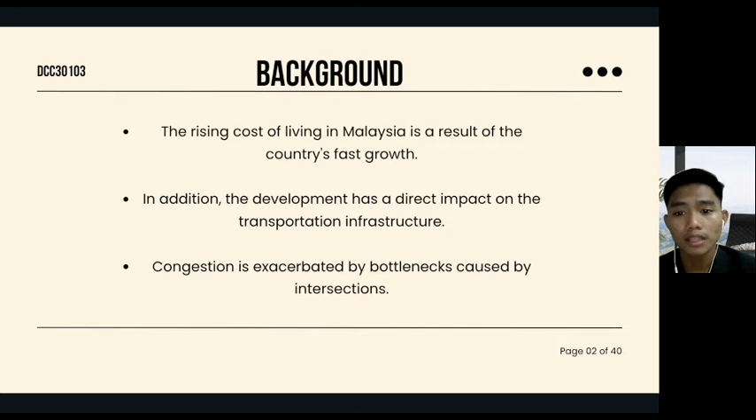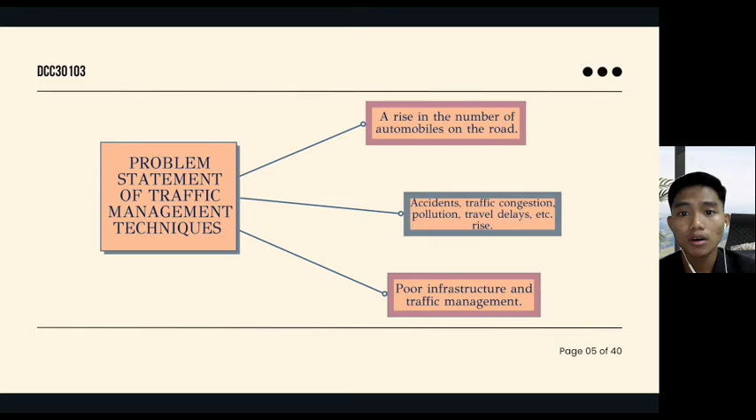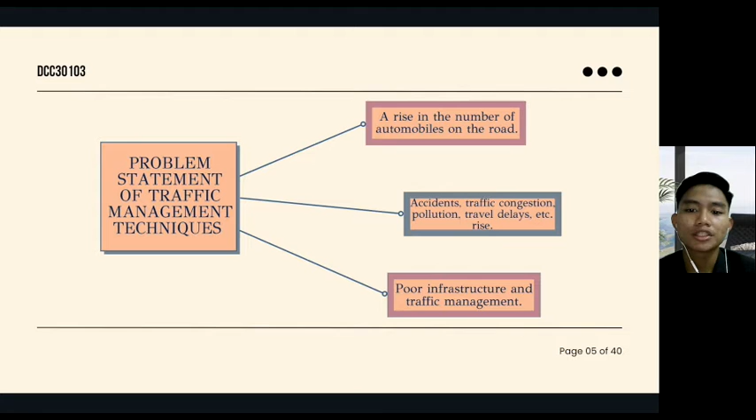Problem statement of traffic management techniques. We have three. The first one is a rise in the number of automobiles on the road. Second, accidents, traffic congestion, pollution, travel delay, and rise. Infrastructure and traffic management.

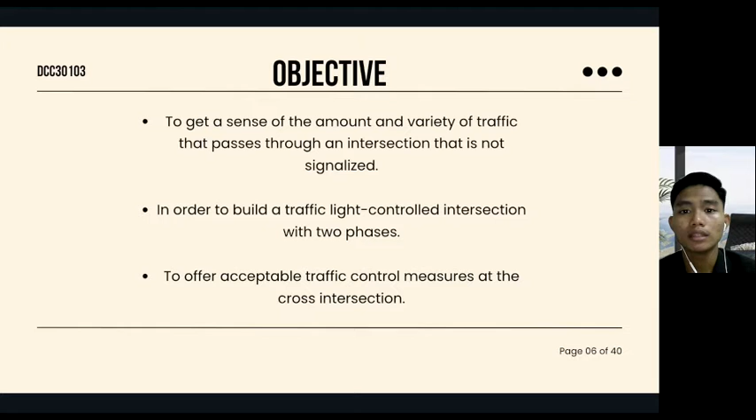Next, objective. To get a sense of the amount and variety of traffic that passes through an intersection that is not signalized, in order to build a traffic light controlled intersection with two phases. To offer acceptable traffic control measures at the cross intersection.

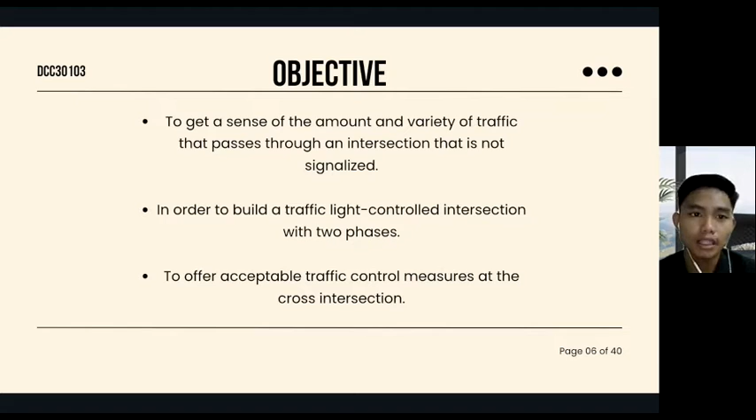Limitation. Inappropriate intersection traffic control. The uncontrolled yield or the stop sign is the sort of control that is used. It should not be utilized in this manner given the current circumstances, which include the volume and speed of the traffic among other considerations.

Inadequate intersection sight distance. On both sides of the street that intersects, drivers do not have enough vision of incoming traffic, which makes it impossible for them to enter or cross the crossroad in a safe manner. Inadequate visibility of the intersection or the regulatory traffic control device. Along the approach, drivers will have a restricted view of an approaching junction and or the traffic control sign at the intersection as they travel in their vehicles.

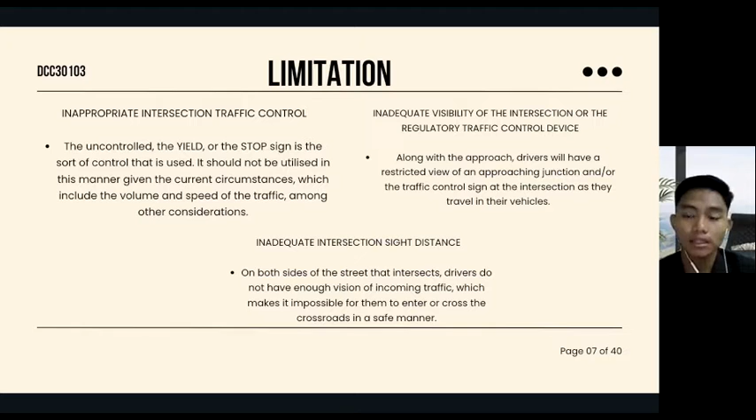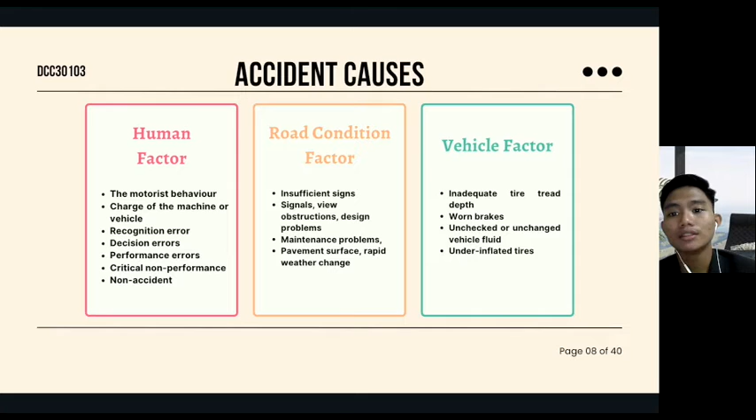Accident causes, we have three. First one is human factor: motorist behavior, charge of the machine or vehicle, recognition error, decision error, performance error, critical non-performance, and non-accidents. Second one is road condition factor: insufficient signs, signals, view obstruction, design problem, maintenance problem, pavement surface, or rapid weather change. Last one is vehicle factor: inadequate tire tread depth, worn brakes, unchecked or unchanged vehicle fluid, and underinflated tires.

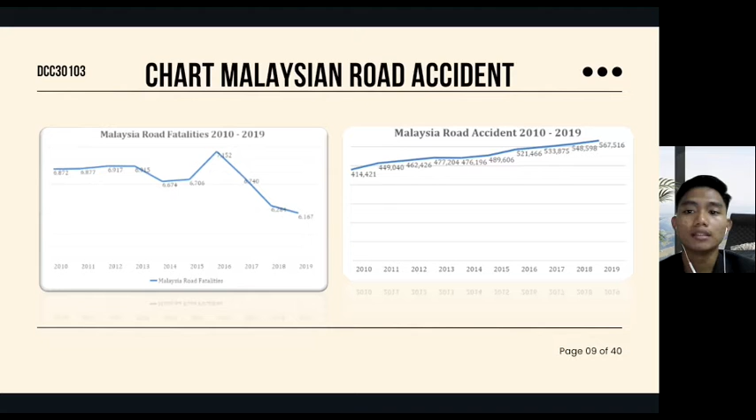Traffic management. Traffic is controlled through enforcing national and state traffic law. Second, educate drivers on how to utilize the road safely. Third, make policy and strategic decisions. And lastly, ensure the safety of all road users by preventing accidents.

Types of conflict at a cross junction. First one, diverging, formed when a single direction flow of traffic splits into two or more directions. Second one is merging, when cars from separate lanes or directions combine into a single lane traveling in the same direction. This is called a merge. Last one is crossing, when many cars from different directions try to cross paths at the same time.

Techniques in reducing conflict at a cross junction. First one, change the four-leg crossroads to a staggered intersection or roundabout. Second, no right turn. And third, both routes are now one-way streets. Last one, one of the roads has become a one-way street.

Traffic control devices. First one is road marking. Road markings are made of lines, patterns, words, symbols or reflectors on the pavement, curb, side of island or on fixed objects within or near the roadway. Second, traffic signs. They are of great help in regulating traffic by imparting messages to the driver about the need to stop, give way and limit their speed.

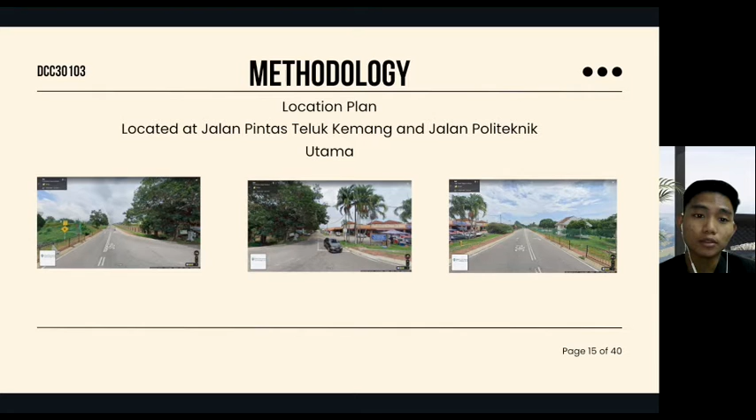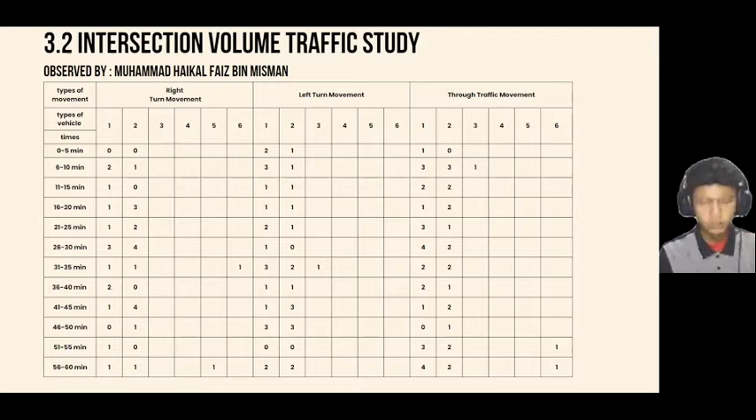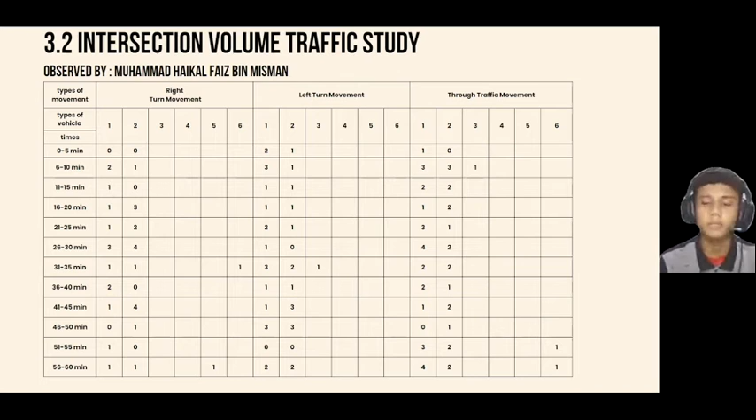And today I would like to present the next subtopic, which is 3.2 intersection volume traffic study. As you can see, this is the data that has been collected or observed by Haikal Faiz bin Misman. Next, we go on to the next data, which has been observed by Muhammad Irfan. Next data has been observed by myself, Muhammad Adib. And the last data is observed by Muhammad Haikal Faiz bin Misman.

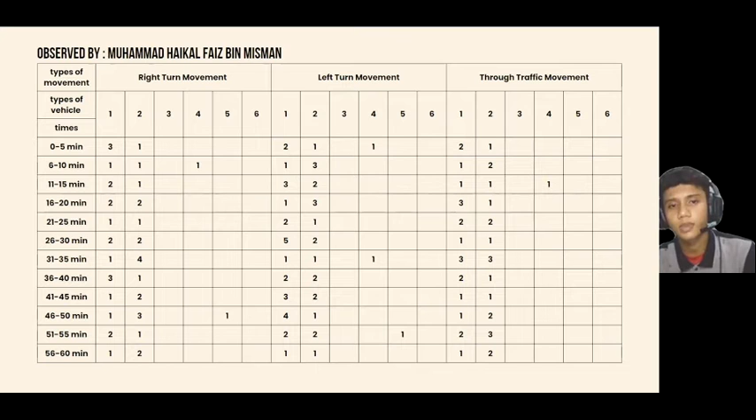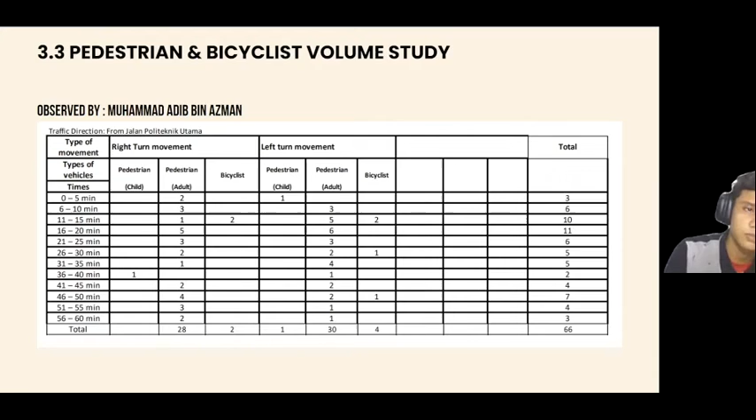Okay, as you can see, we go on to the next subtopic, which is 3.3 pedestrian and bicyclist volume study. This data has been collected or observed by myself, Muhammad Adib, and the total is 66. And the next data has been observed by Muhammad Haikal Faiz bin Misman, and the total

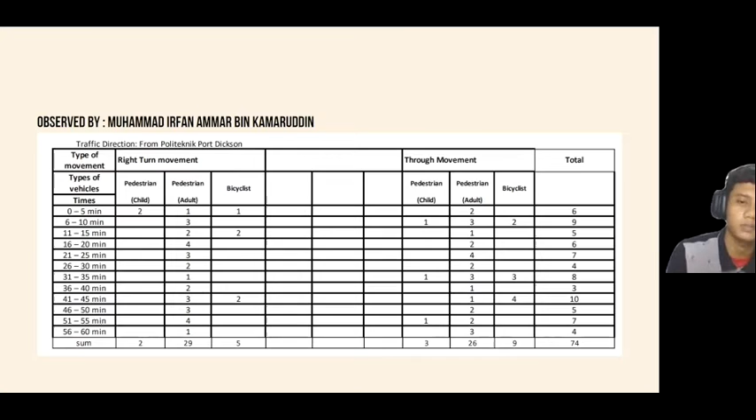is 70. And we go on to the next data that has been observed by Muhammad Irfan Ammar, where we get the total of 74. And the next data has been observed by Muhammad Haikal Faiz bin Misman, where the total is 32.

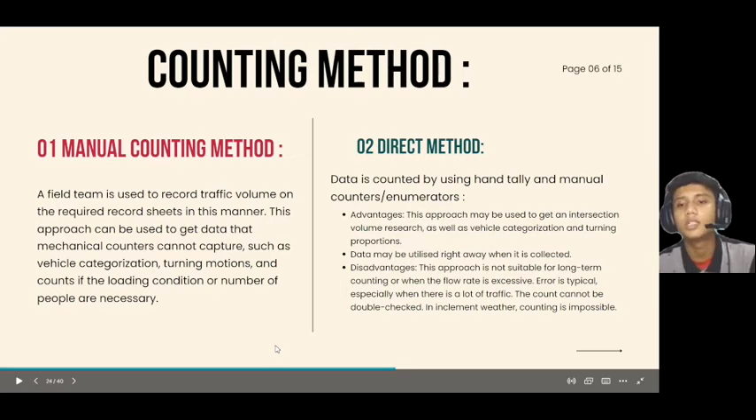Next, we go on to 02 direct method. Data is counted by using hand tally and manual counters by enumerators. There are several advantages and disadvantages. First advantage is this approach may be used to get intersection volume research as well as vehicle categorization and turning proportion. Next, data may be utilized right away when it's collected.

The disadvantages of this method are that this approach is not suitable for long-term counting or when the flow rate is excessive. Error is typical, especially when there is a lot of traffic. The count cannot be double-checked. In inclement weather, counting is impossible.

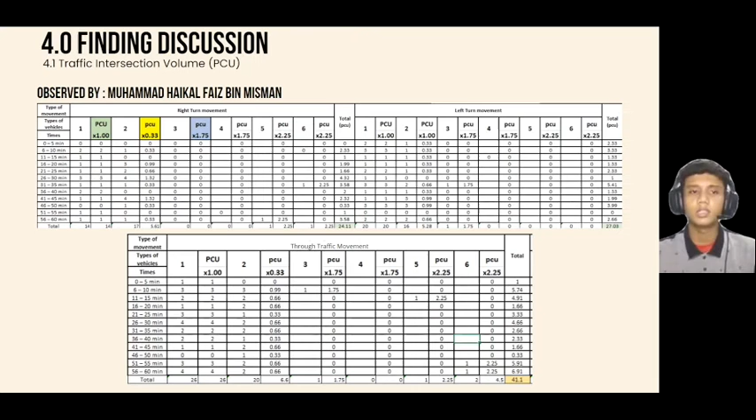Next, we go on to the next topic, which is 4.0 finding and discussion. 4.1 traffic intersection volume, which is PCU. And this is the data that has been observed by Haikal Faiz. Next data is observed by Ammar. The next data has been observed by myself, Adib. The last data has been observed by Haikal Faiz.

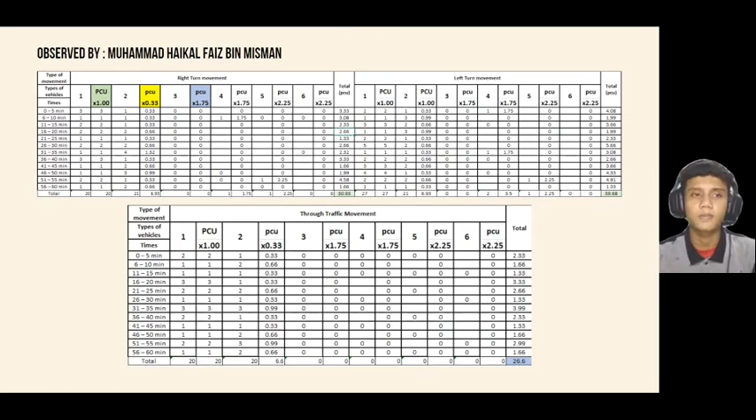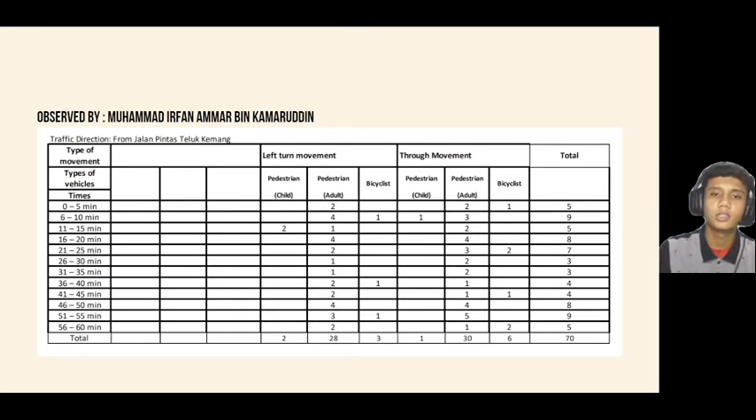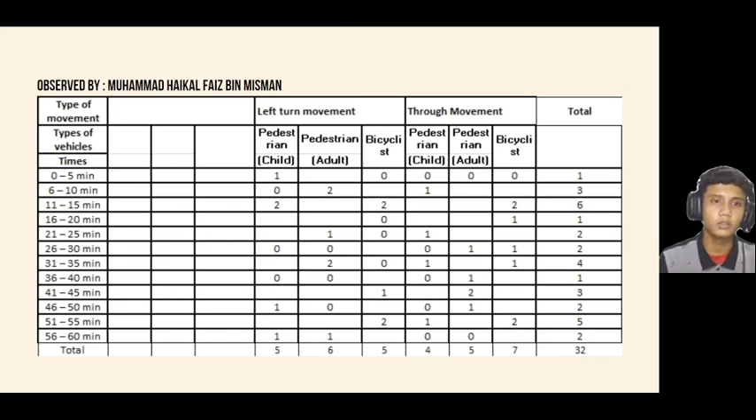This is the data that we get from the pedestrian and bicycle count. This data has been observed by Haikal Faiz. This has been observed by Ammar. And this data has been observed by Adib. And lastly, this data has been observed by Haikal Faiz.

Go on to 4.3 two-phase traffic light circulation. The data that we collected, we merged into a table, which is like this. As you can see, there are four ways or 4 roads, which are north, south, east, and west. For each type of vehicle, which is car, passenger, motorcycle, light van, medium lorries, heavy lorries, or bus, we have to multiply

with each PCU that has been given; for car, the PCU is 1. So we just get the data, which is 60, then we multiply by 1, which is PCU 60. Then we combine them to get the PCU per hour, combining all of the north PCU, south PCU, east PCU, and west PCU. And then we get a PCU per hour which, as you can see, is 89.8 for north, 97.5 for south, 99.96 for east, and west is 97.21.

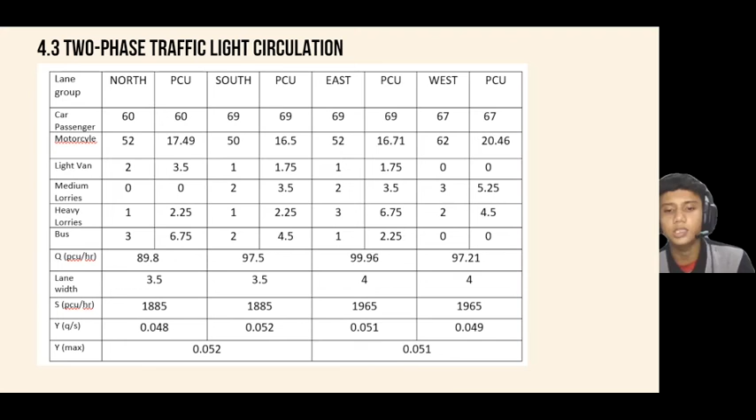Then we get the Q, which is PCU per hour, and we divide it with S, which is PCU per hour for lane width. Which means 89.8 for north, we divide it by 1,885, and we get a Y, which is 0.048 for north. And south we get 0.052, for east we get 0.051, and for west we get 0.049.

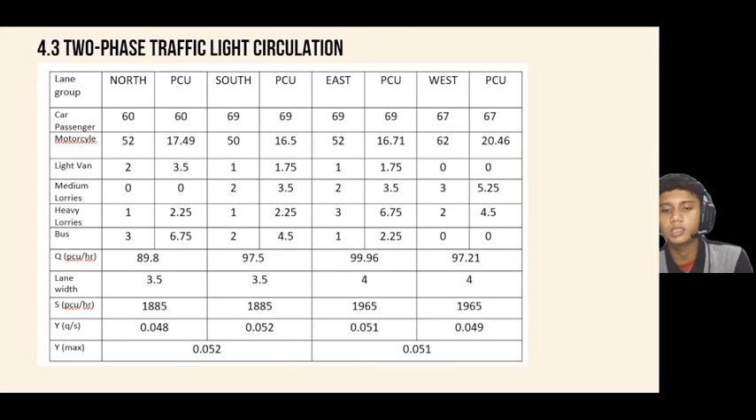Then we're gonna take a max for each Y, which is the max for north and south is 0.052, and for east and west we get the max is 0.051. From there, we take the equation, which is Y equal Y1 plus Y2, and from the data we take the data into the equation, which is 0.052 plus 0.051, and we got 0.103. And we go on to optimum cycle, which is CO.

And we got from the CO is 17.574. And actual green time per phase or effective green time G, we use the equation which is G = CO minus L, which is 17.574 minus 8, and we got 9.574.

Then we go on to effective green time per phase and use the equation which is Gi equal Yi per Y multiplied by G. For the G NS, we got 4.833, and for the G EW, we got 4.741. Then we go on to actual green time per phase for K.

We put the equation which is K equal G plus L minus A. For K north south, we get 3.833, and for K east west, we got 3.741.

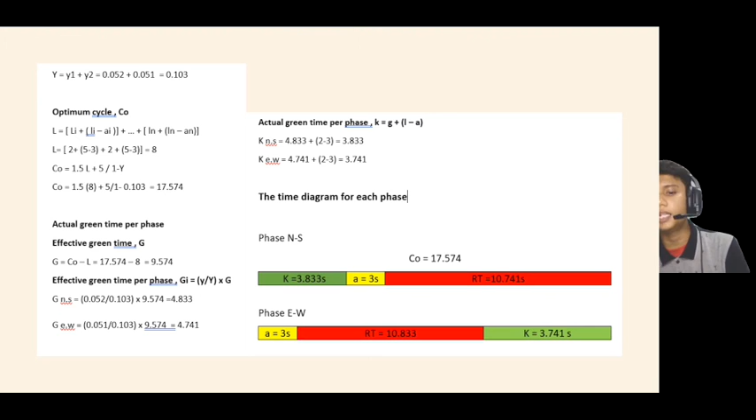Conclusion and recommendation. Based on our findings, we discovered that motorcycles make up the bulk of the vehicles in the region. The vehicle will be the second most common mode of transportation. Furthermore, long-term monitoring should be conducted to provide a better knowledge of the traffic volume at the intersection. In conclusion, the study goals have been met.

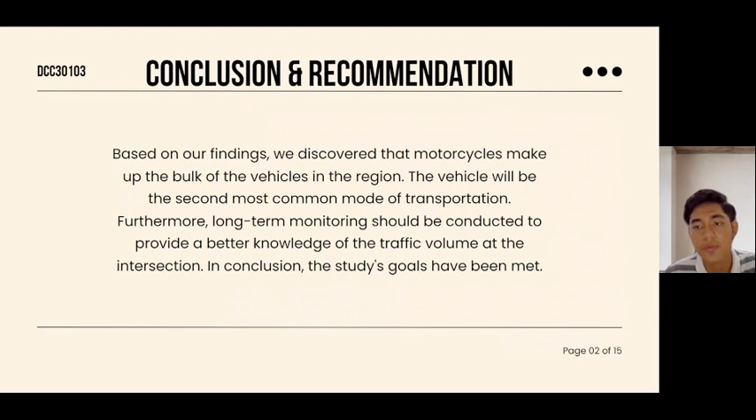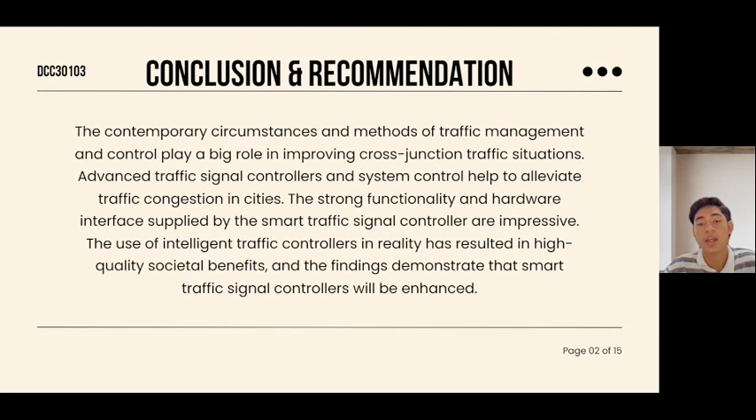The contemporary circumstance and method of traffic management and control play a big role in improving cross-junction traffic situations. Advanced traffic signal controllers and system control help to alleviate traffic congestion in cities. The strong functionality and hardware interface supplied by the smart traffic signal controller are impressive. The use of intelligent traffic controllers in reality has resulted in high quality societal benefit, and the findings demonstrate that smart traffic signal controllers will be enhanced.

Traffic management system using wireless technology. The RF receiver is positioned on the signal pole, and the RF transmitter is mounted on the emergency vehicle. When an emergency vehicle approaches the junction, it transmits a signal to the RF receiver, which then sends the signal to the main control system. The control system will compute the estimated time for a green signal when an emergency vehicle is traveling, while keeping the red light on for the remaining lanes.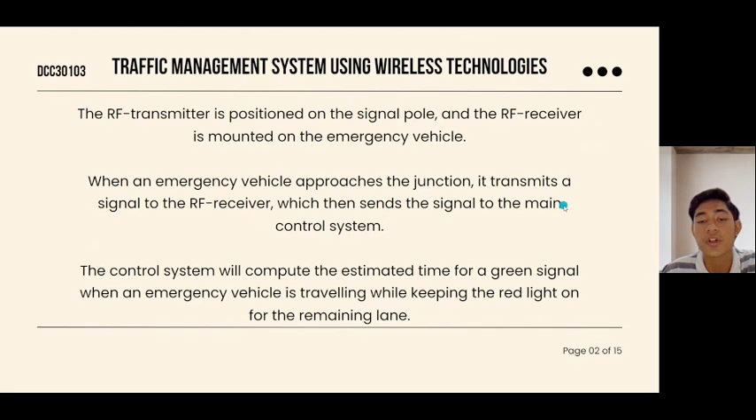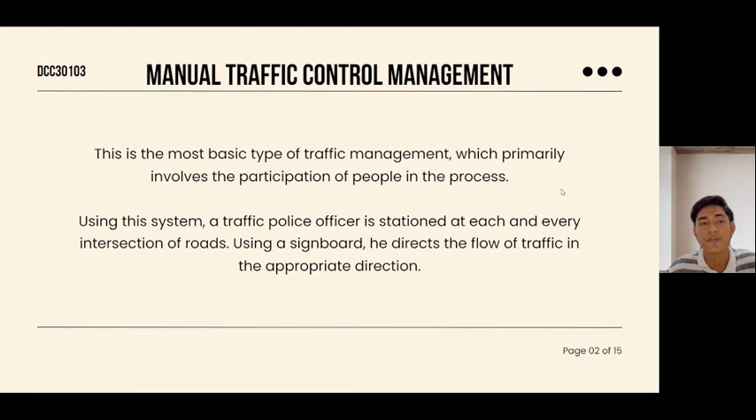If there is higher volume of traffic on the road, the officer in charge of traffic control will indicate to the driver of the car whether they should continue driving or pull over. They are also able to identify emergency vehicles on the road and give precedence to the lane in which an emergency vehicle is traveling while they are on the road.